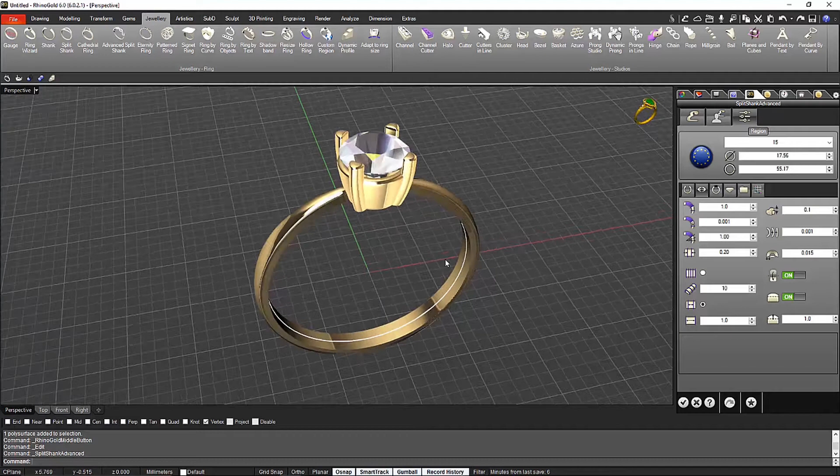And the very important thing in this part is, first I'm going to set up the height. As you can see, you always have the tooltips telling you on which dimensions we are applying the modifications. So 1 point, you see, all the time it's in real time, so 1.9 is okay. I will do the same on the side profile, 1.9, and on the bottom profile probably I will go a bit less, so just say 1.5.

The width, what I would like to do here is have the same dimensions on the top and side profile, because then probably I will set up stones with this kind of setting that is called fishtail. So let's say that we will set stones of about 1.5. So I will leave it at 1.6, and 1. Oh, wrong way, and 1.6. And yeah, the bottom is a bit wider. We can go to 2.6. All right.

And now here comes the interesting part. What can we do with these grids? Okay, have a look at that. We have the two views. This is the side view of these shoulders and the top view. What happens if I do like this now? As you can see, anything that I do on the grid that we have here is happening in my document. Okay, so now as you can see, I want to follow this line and then wrap the stones till here. Okay, so I need to start to play a bit more with that.

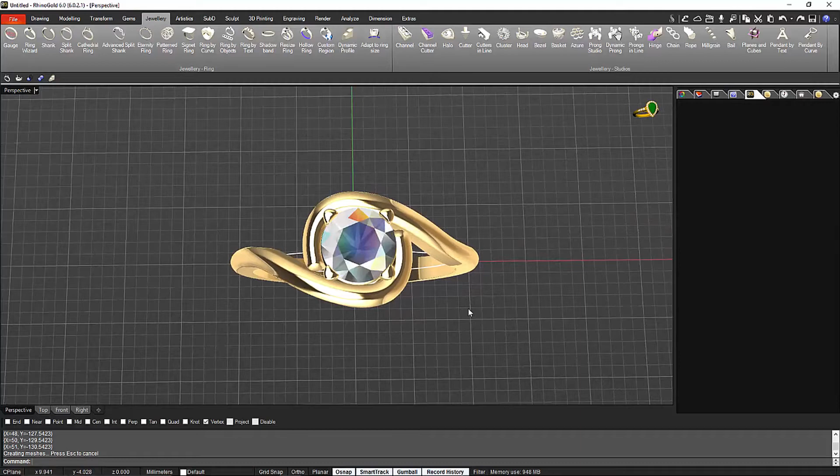Okay, we validate. So we have this ring now. What's the problem here? I want to make a matching wedding band, so I need to follow all this shape around. There is a very easy way to do that. Modeling, and I go to duplicate the edge. I duplicate this one, and this one. I press enter.

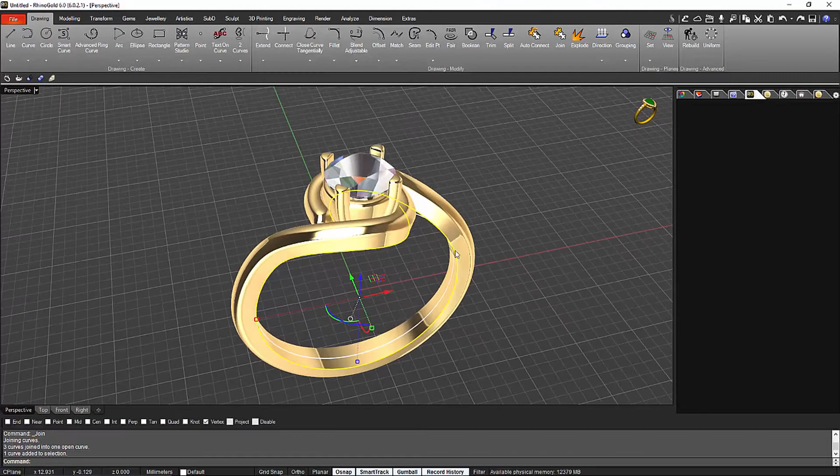Now we have all this edge. The only thing that I need to do is just go to drawing and join them. Okay, now let's see if we have just one curve. There we go. We have one curve just following all this shape. What is left? Easy. We have in the jewelry tool our dynamic profile. We have been using this profile many times. As you can see now, it's following just the shape of the ring.

The only thing that I need to do is just play on these profiles. So this is one profile that I have. First thing that I will do is just rotate it to have it straight. There we go. Now I will set up 1. I will do the same that I had here, that was a bit more. There we go. And now I will use the width to set these stones, 1.7. Enter. So we already set up the first profile.

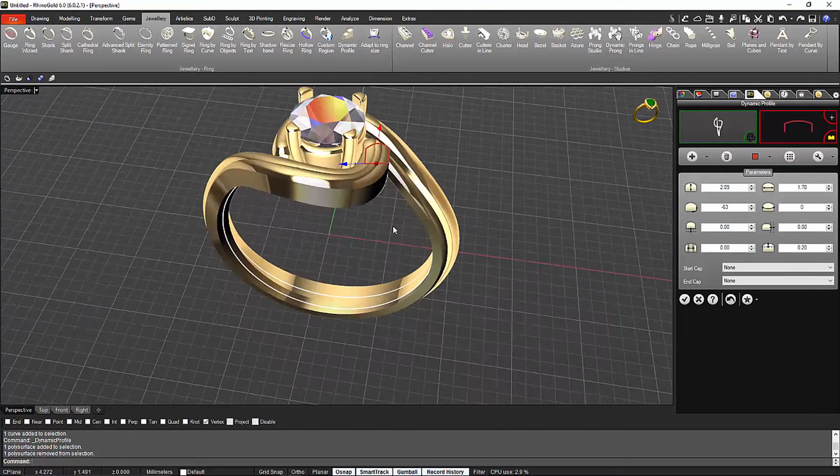We can just move it away from the solitaire. As you can see now, I'm just setting up at which distance I want it. We will leave it at this distance, and I still can just move the profile, so then I will be able to marry this profile with the one that is coming the other way. Alright, so we have this one here.

Now I'm going to work on the other side. This is where we have the other side. I will get closer to move it in the right direction. So this is where I think it will be the right place. I used the same height, that was 1.7, and a width of 1.7 as well. Then with the arrow I can just apply any change to be able to match

the other side. Alright, so now we are just here, and now I need to move it as I did on the first profile, to move it away from the solitaire. Alright, and I just drop this one. And now to finish this matching wedding band, as you can see, it's following pretty much exactly what we have. The only thing that I will do is just add another profile at the very bottom, so we can set up the right width and everything on the bottom.

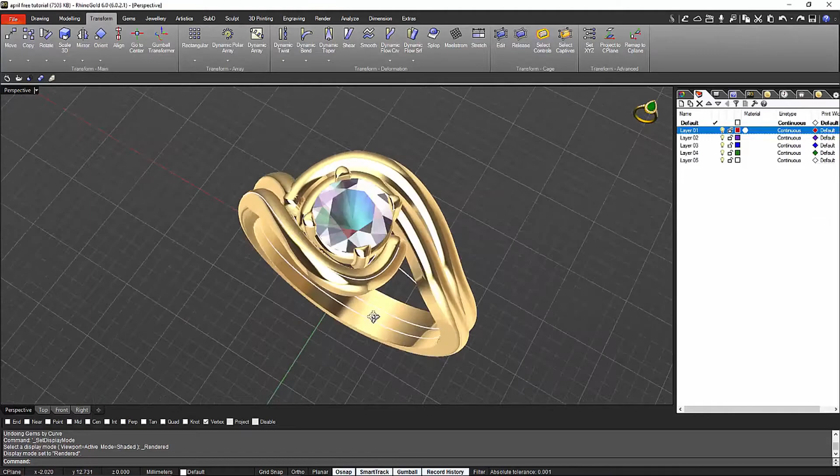Alright, so now it's straight. I will leave it the same as I did with the solitaire, 1.5 on the height and 1.7 for the total width. Alright, now the ring is ready. As you can see, we have the engagement ring and the matching wedding band. So what will be next will be to look for the isocurve so we can set the stones on this ring.

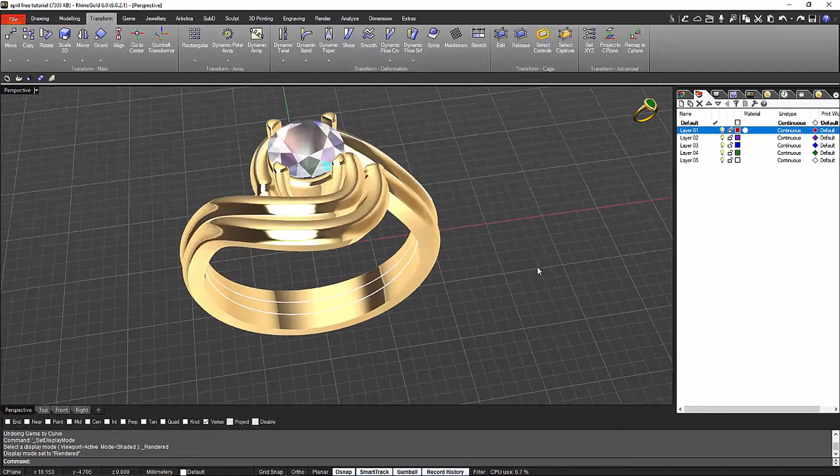Okay, so I have the ring in two different layers, so it's easier to work, because I can lock or hide any of the two parts so it doesn't interfere with what I'm doing. Alright, so

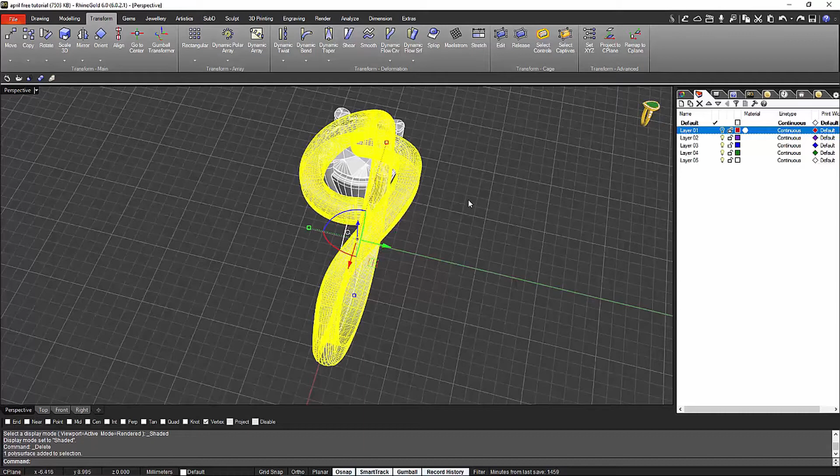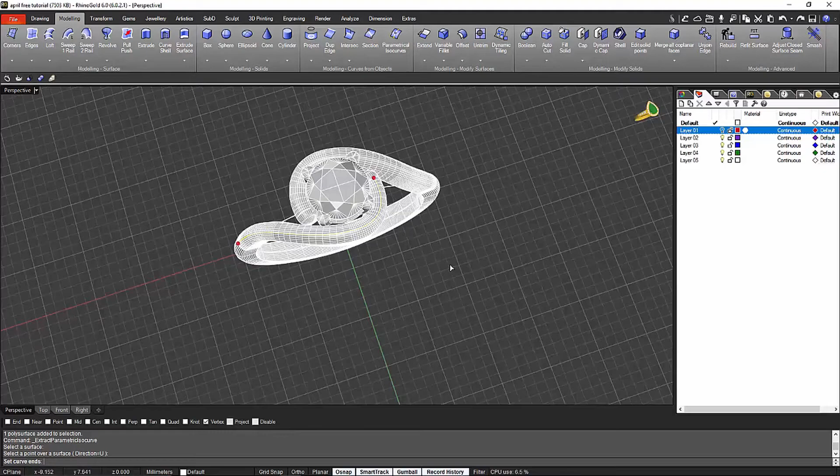from modeling I go to the parametrical isocurve, so I can set the start and the end of this curve. Alright, so where the red dots are is where I can set start and end. So this is okay, this is the length that I want. I will do it just on one side, because you can duplicate it or rotate it on the other side, so you don't need to work twice.

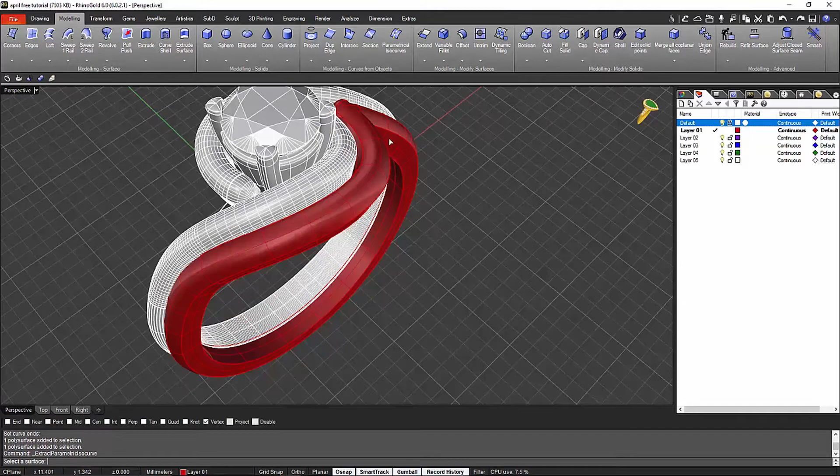Okay, so now I will go for the wedding band. As you can see, I lock the solitaire, so if I click on it, it doesn't do any kind of action. Have a look at this line. Do you see this line? This is the line that is just placed in the middle. This is the line that we need to look for when we are going for the isocurve. As you can see now, I place it on top, and we have the whole isocurve.

I just set up the end to finish at the same level as the engagement ring. So this is what makes the ring nicer: to have the stones from the engagement ring and the ones from the eternity ring ending at the same level. I will do the same for the other side.

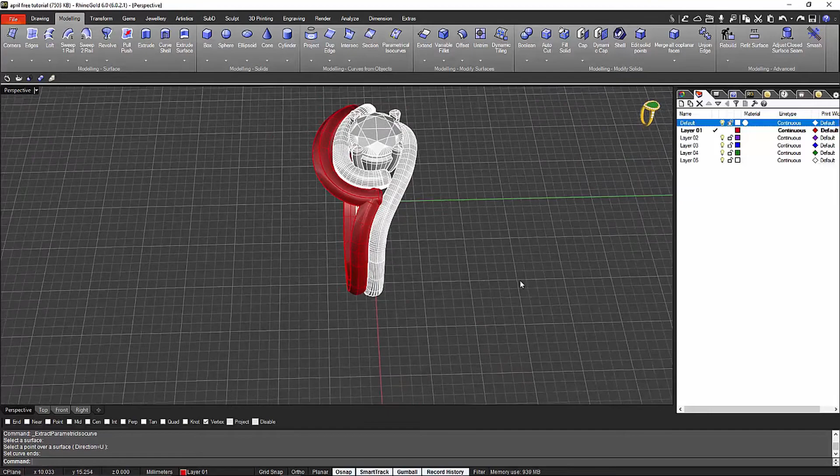So this is the side that I want to work with. I just mark the isocurve to know where I need to end the matching wedding band. Parametrical isocurve. I place it in the right place. We have the two dots, and now I just place it, as you can see, at the same level.

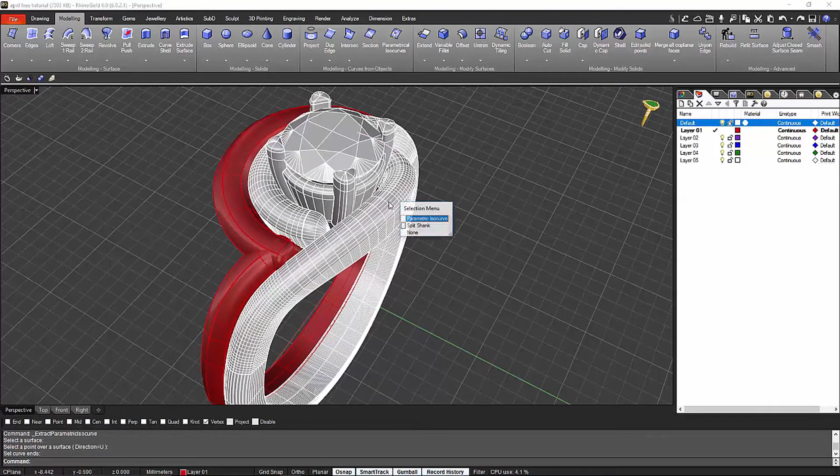Now I select the isocurve that I have on the solitaire, because now it's time to start to place the stones on this curve. As you know, once we have a curve, the best option is to use the gems by curve. I select the curve, I select the surface where I want to place the stones, so the stones get the right direction.

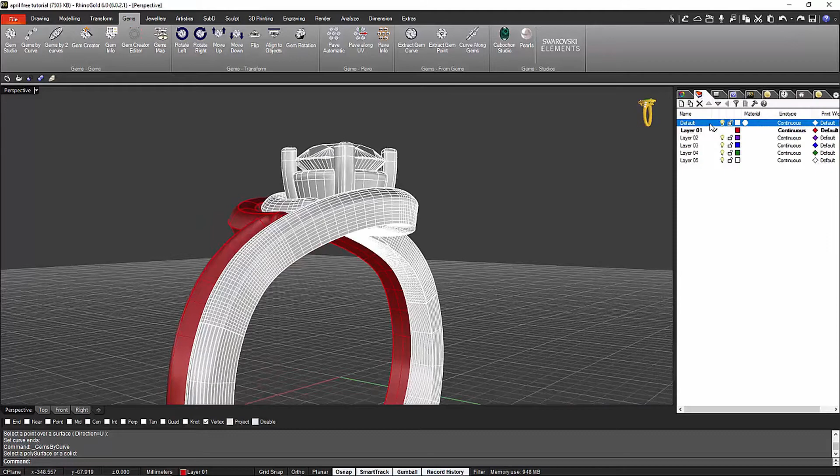Let me do it on the right layer. So let's do it again. Parametrical isocurve. I select the gems by curve. I place it on the surface where I want to put the stones so they take the right direction. And now what I will do is just drop this stone a bit inside the ring, because we need to set that stone. So the way to do it is we go to the second tab and under the surface. Now as you can see, the stone is under the surface.

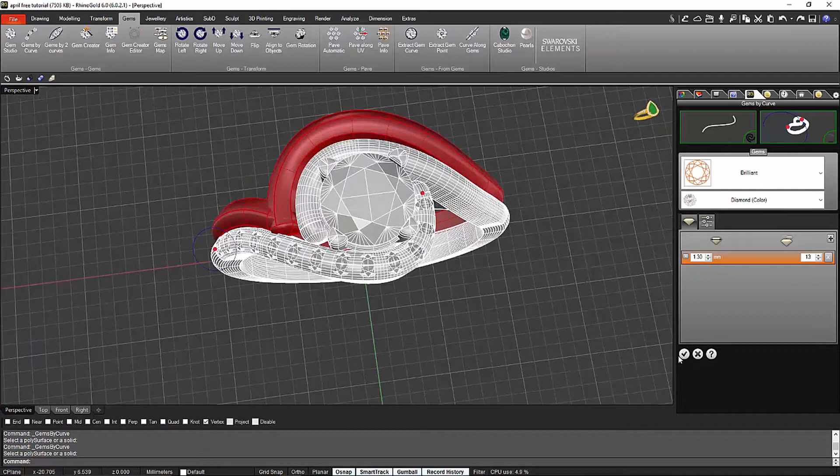I will go to the first tab. I set up the size, 1.3 is okay, and I start to do the duplication till I reach the end where I want to finish these stones. Validate. Okay, so as you can see, we are working just on one side, because then we will do the rotation and we will have the stones and the cuts symmetric on the other side.

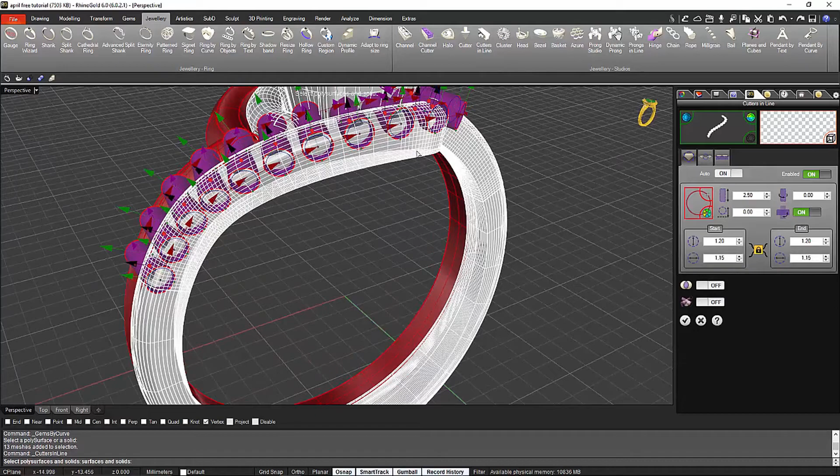So now I select the stones. And from jewelry, I start with the cutters in line. Always the same workflow. This is one of the good things about RhinoGold. You are always following the same workflow. So shift key, you know that if I press the shift key, the change that I'm doing in one of these cutters will happen to all of them, as you can see.

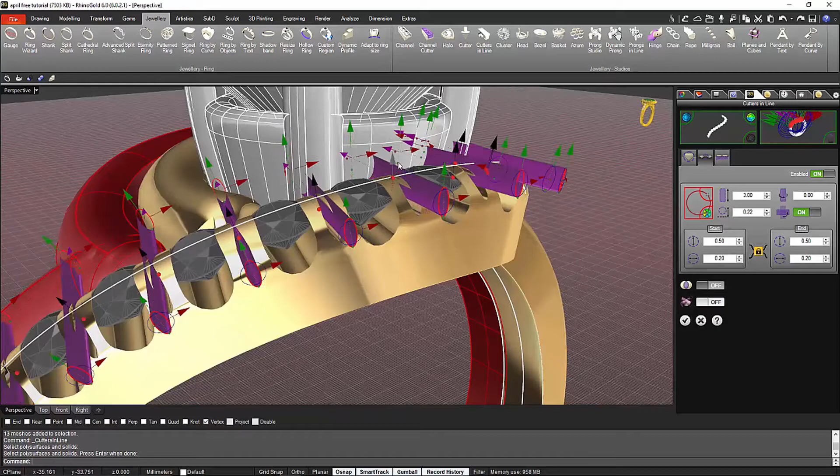I will do the same with the cutters just in the middle, so we have the line where we split the prong to set the stones, and then we will do just the line or the sweep passing through all the stones. Okay, so we have everything done.

This is the part that we will set the stones from, and now what I will do is just do the boolean automatically, and because I want to keep one copy to rotate it and do it on the other side, I keep one copy. I switch the switch to on, and now once I press validate, you will see how I do the boolean on this side, but I still keep a copy. Let me move it so you can see that the boolean is done. As you can see, the boolean is already done here.

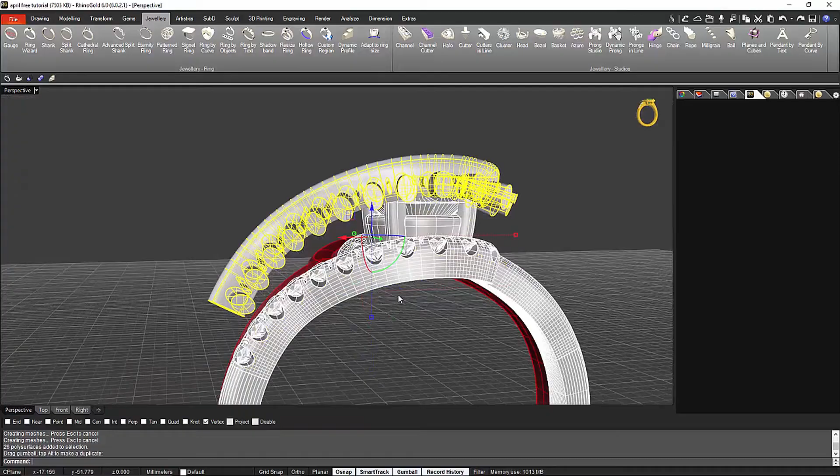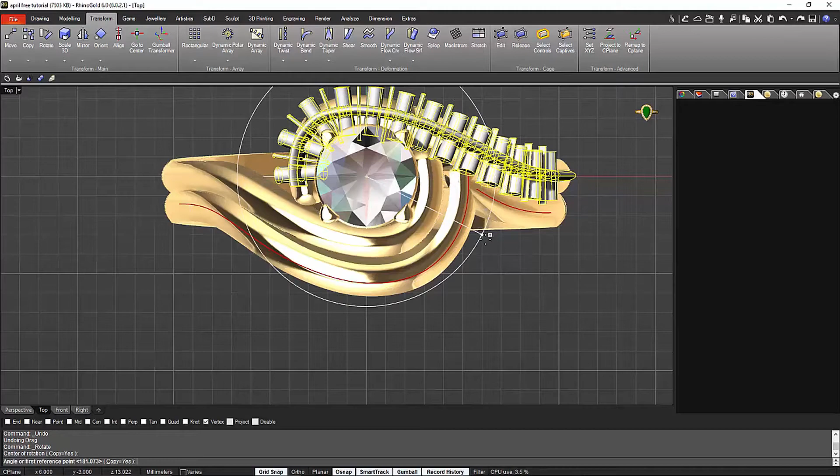And now from the top view, I will rotate this to the other side. Rotate. I want a copy, so I keep. But here actually I could put no, I don't want a copy, because the boolean is already done. But even so I will do it, and I just rotate it 180 degrees.

Now we will do the Boolean difference with the copy that we did on the other side. Okay, and now what will be left is just do the same with the stones. So we get the stones and we just rotate it on the other side.

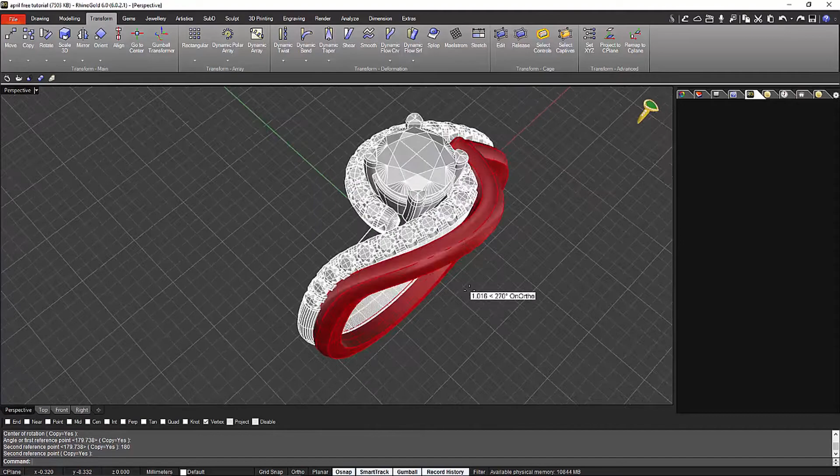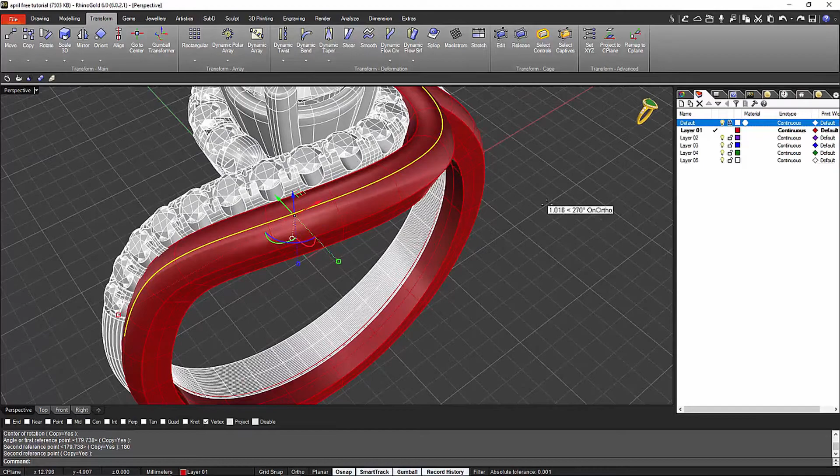Okay, now that we have the engagement ring done, let's do the same to the wedding band. Okay, so I will lock the solitaire layer and I will work just in the layer where we have the wedding band. Alright, so I have the curve ready.

So as you know, the same that we did before, gems by curve, we select the surface where we want to place the stones to get the right direction for the stones under the surface. And now on the first tab, again, we set up the same dimensions for these stones. They are just at the same level, matching the engagement ring, and we start to do the duplication.

Just be sure where you want the stones to be placed. I think that I will probably go for another one. Yes, I think that like this is okay. Okay, let's do the other side.

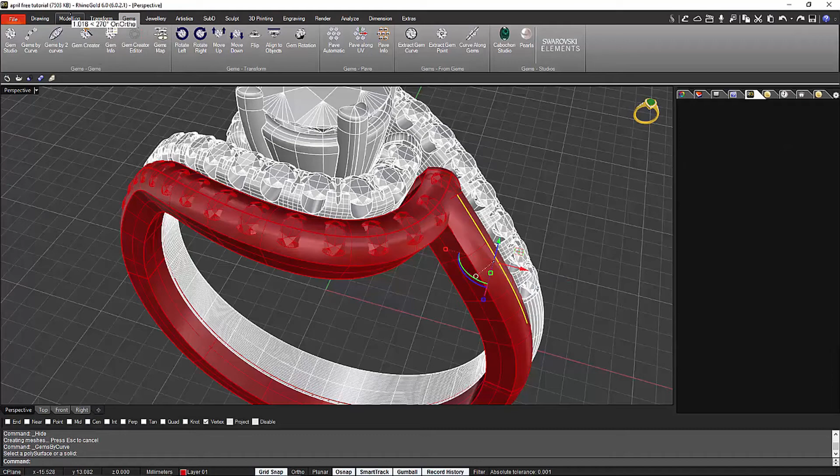Again, we select the isocurve, gems by curve, we select the part where we want to place the stones, and now on the surface, from here we set up the right dimensions and we start to do the duplication.

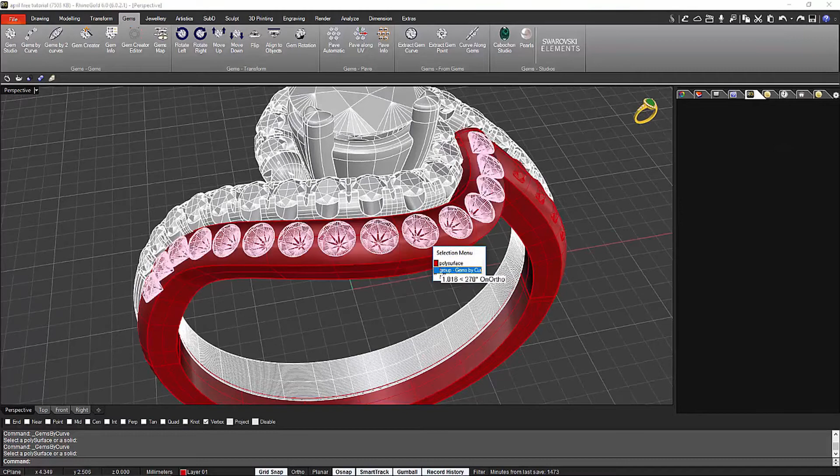Okay, now we move it away because I don't want this stone to be too close to the one from the other side. And as you can see now, we just select the stones and we will do the same that we did with the solitaire. We go to cutters in line and we do the same.

We need to select, as you can see, if I move this and I don't have the surface, I don't see it in real time. Once I select the surface, I see in real time how it looks, the cutters that I'm using. So we have the first part done, and now we go to the second tab to make the ones in the middle. We put the switch on.

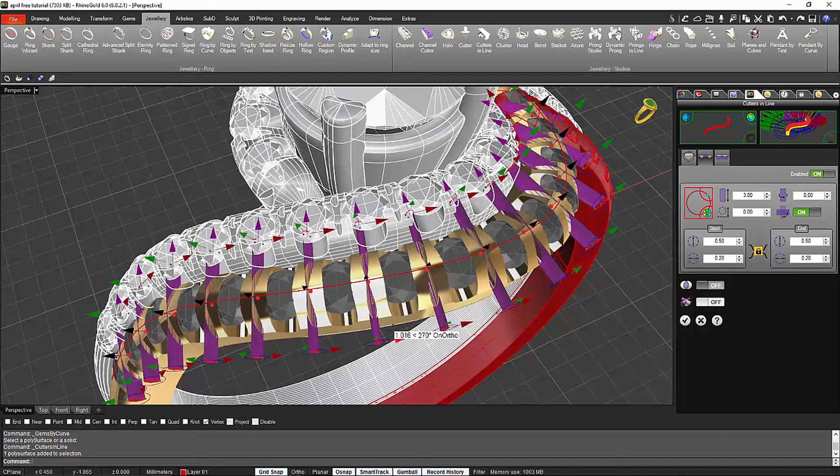I just raise them a bit, and what will be left is the third tab that I will be setting up the cutters that go through the stones. I will set it up to about 0.60. It's what I use on the solitaire.

And on that one, I shouldn't get copy because the only thing that I will have to do is just, let me check, I'm checking that this one is not interfering with the other side. Okay, so I will make it shorter because as you can see, if I don't press the shift key, you can act on all these cutters one by one.

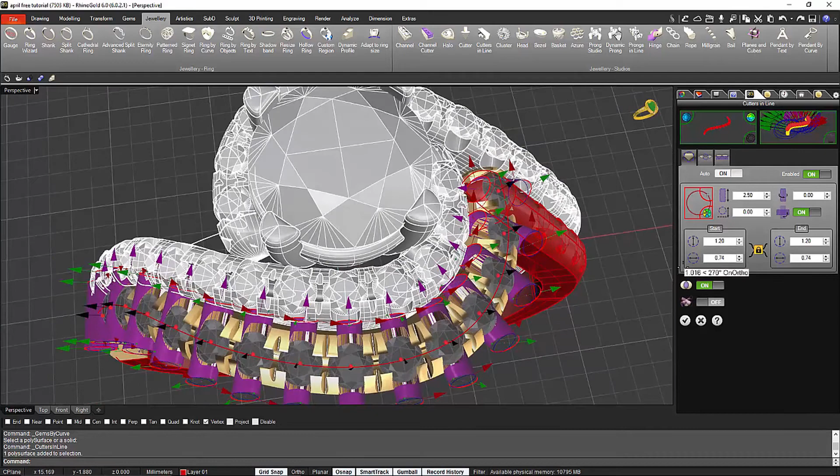Okay, so all the ones are how I left them, so I press the Boolean operation. I think that it will be okay like this, and validate. Look at that, perfect. Let's do the other ones.

I select the stones, again, gem cutters in line, sorry, select where do I want to place them. So I can see them in real time. Shift key to act on all of them the same. I do the ones in the middle.

I just work on the ones that go through the stones, as you know, 0.6, as we have done with all the other ones, and perfect. And validate. Alright, we have it on both sides now. Now it's time to do the next.

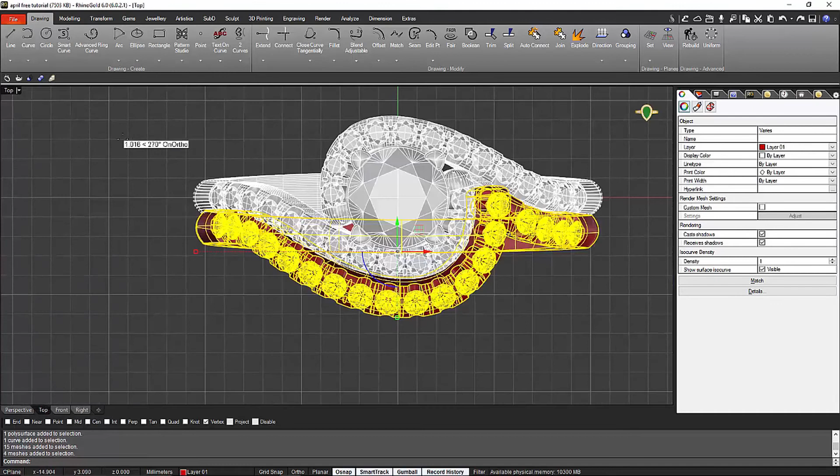That will be to do the mirror on the other side. So I select all the parts that I want to mirror on the other side, so the shank and the stones. I do from the transform tab, rotate from the middle. I set up the angle, and now I just say 180 in the command bar, and there we go. Enter.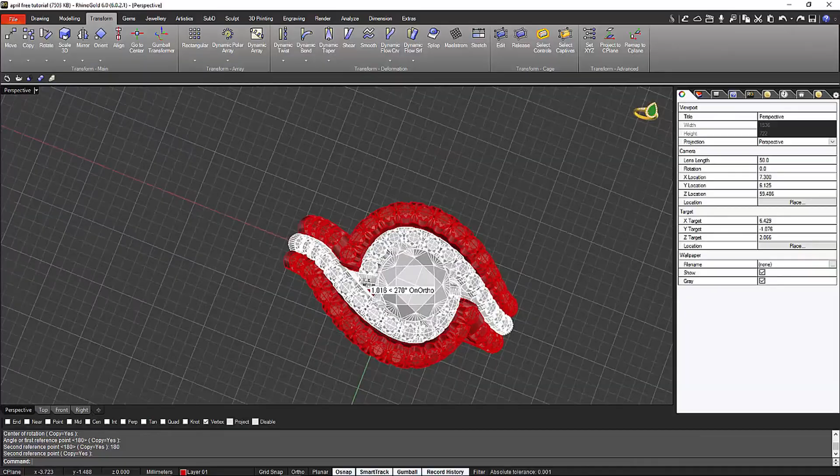And now we have this nice setting. So we have the solitaire with the two wedding bands. So one can be the wedding band and the other one the eternity ring, and we have a very nice set to make the nice render and show it to your customer.